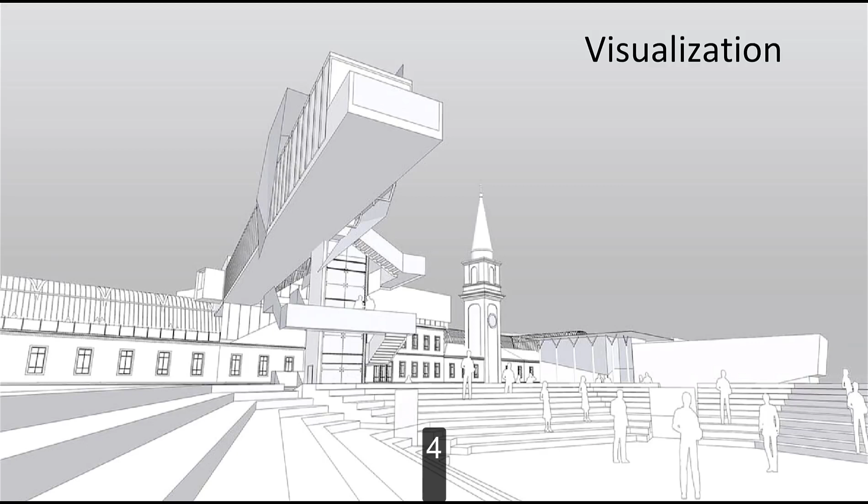Now, this is what architects and building designers have been doing since the very start. Of course, the way that they did it to begin with was with paper plans. These 2D representations of 3D space did what they needed to do, but they weren't always easy to read. As a design professional, I can sit down and look at a 10 by 10 space called out on a piece of paper and have an idea of what that feels like.

What's it going to feel like with an 8-foot ceiling versus a 9-foot ceiling? What does it look like with the doors and windows on this side of the room versus that side of the room? How's that going to change things? A design professional can look at those 2D pages and understand that. And we try to make that something that's easy to comprehend for customers. We add things like elevations and sections and isometric views. And it works out okay, but it's not something everybody catches on to right away.

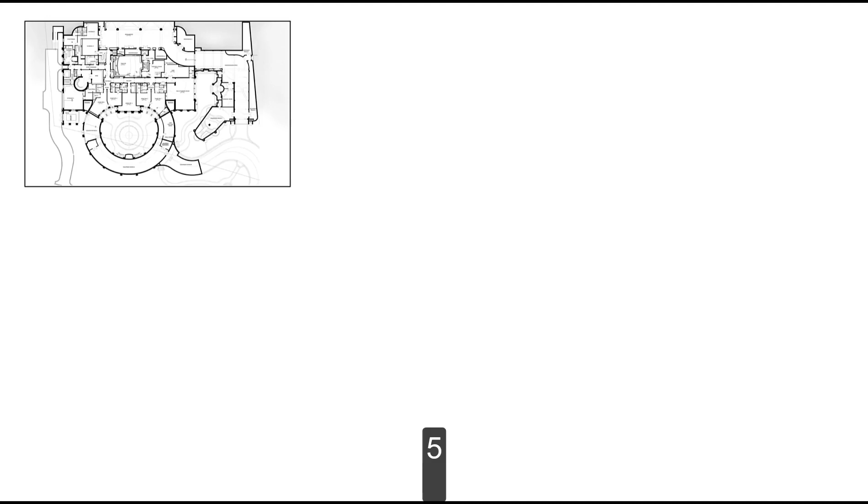That's why we have to do things like practical models. These foam core or balsa wood or even 3D printed models give somebody a chance to look inside and see how that actually exists in 3D space. It's all right, I can do things like light studies and flows through rooms and that sort of thing, but it's still not a real experience. I can't jump down and stand inside that. Plus, as changes are made, that potentially means starting over on a model, which can be time-consuming and expensive.

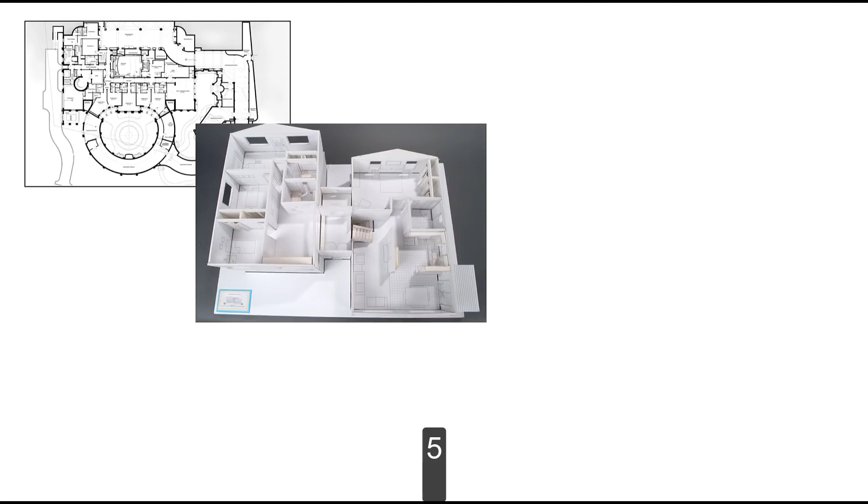This, of course, is where software like SketchUp comes into play. With a SketchUp model, I can not only navigate through a space, I can actually stand inside a model and look out of it as if it were real size. Changes that need to be made can be made real time without any costly rework. It's a great way to help somebody who is not a design professional experience a space in 3D. But it's not complete, and it's not the ultimate way to view or experience that space.

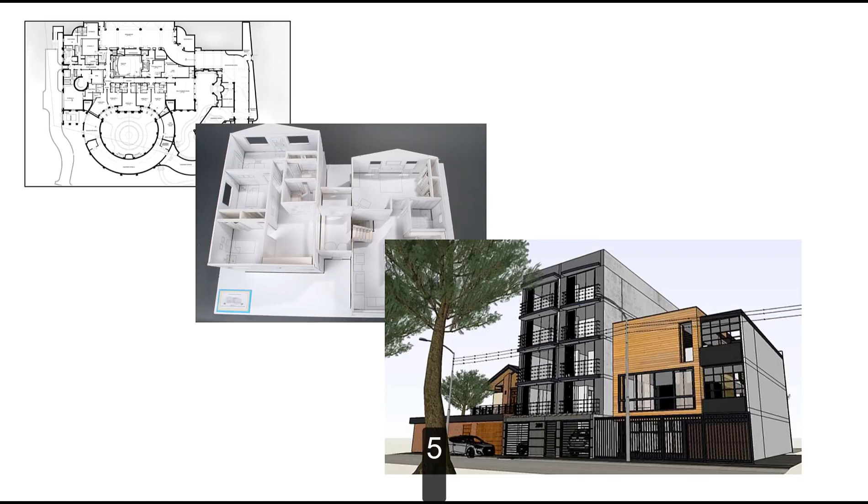One of the things that a lot of people end up doing is, of course, they get into rendering and animations and that sort of thing. This is not a bad solution either. This is kind of the next step. But there is a limitation to rendered images or videos from inside of a 3D model. And that, of course, is that it's on rails. It's limited to a single view, that sort of thing.

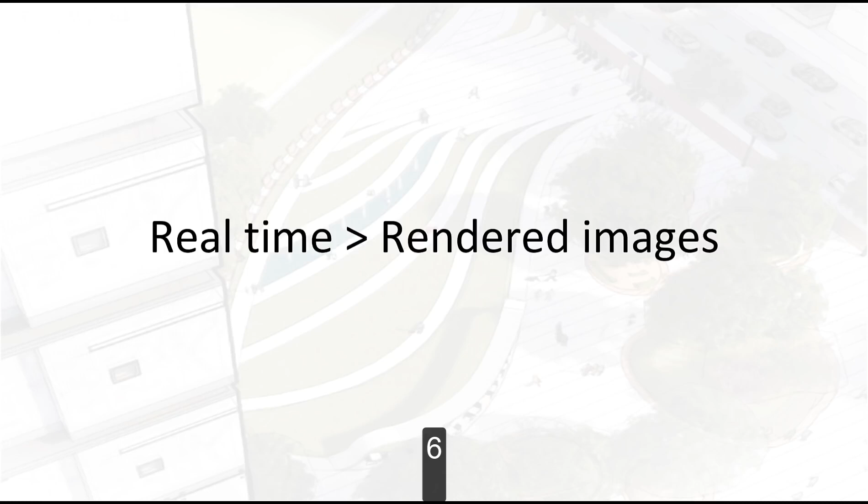This is where we believe that real-time rendering is better than those rendered images. Rendered images can be great, they can look great, but the fact is, you don't get to move through a rendered image. Even with pre-recorded videos or fly-throughs or fly-arounds, you're limited to the path that the designer wanted to show. With real-time rendering, the customer gets to immerse themselves in the model and move where they want to. It sounds silly, but a lot of customers have a way that they want to look at the house they're building that may be different from the prize shot that a designer wants to show them. Real-time lets them do that.

So, what's the best way to let a customer experience real-time? Well, we're biased, of course, but we think Unreal Engine and SketchUp are a great way to do this. Epic Games and Trimble have products that work very well together. As of this 4.20 release, they allow you to seamlessly integrate your SketchUp model into your Unreal design.

So why Epic Games and Trimble? Well, a couple reasons. The first one is speed. When we're talking about conceptual modeling, conceptual means I have to go quickly. I can't spend days, weeks, months on a potential design. I need to get it turned around quickly. In fact, the matter is, SketchUp is known for its speed in those sorts of design situations. Conceptual modeling is something that is done every day by design professionals inside of the SketchUp software.

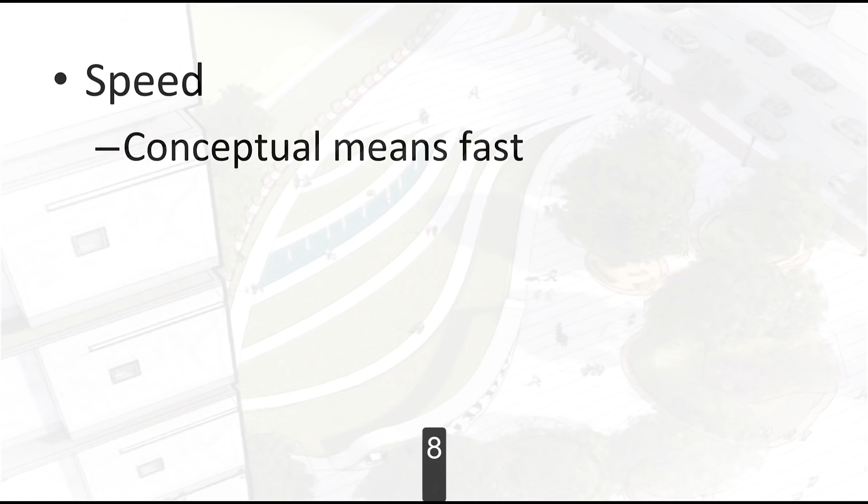And usability. So as we already talked about, with SketchUp, it is easy to use, it's quick to turn around a model, but looking at it from your customer's point of view, the deliverable out of the Unreal Engine is about as simple as it can get when it comes to navigating in 3D space. This gives your customer the ability to go where they want in the model and walk through in a natural way, using their arrow keys to just navigate wherever they want. It's quick and it's easy to do.

And finally, experience. SketchUp's been the go-to modeler for conceptual modeling for a decade and a half. A lot of 3D modelers nowadays cut their teeth on SketchUp. And Unreal, of course, Epic Games has taught an entire generation how to navigate spaces in 3D. So between the two, we have decades of experience in 3D modeling and allowing people to explore that 3D space. So really, that explains what we think of visualization and why we think Unreal and SketchUp work so well together to help you give your customer a unique experience in their designs.

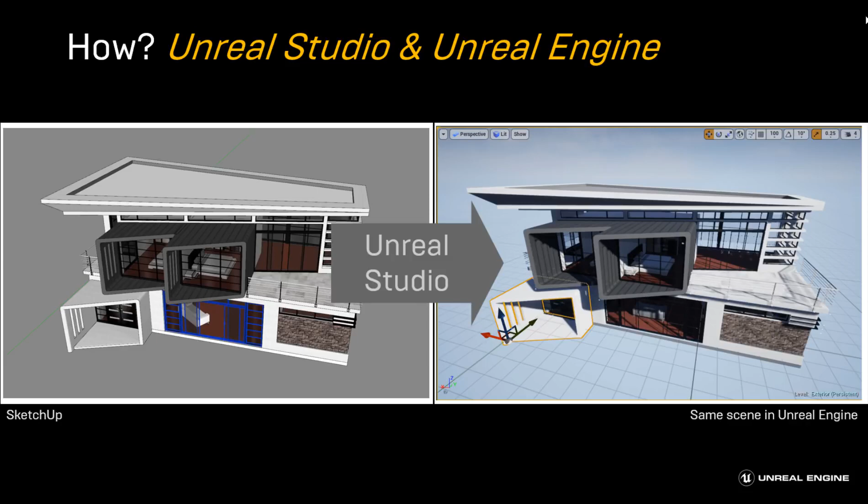So what we want to do is get a really nice looking piece of content from SketchUp and get it into Unreal Engine, preserving as much of the original look as possible. Now this has a lot of implications for how you create your content, and we'll get into that in a few minutes.

But let's at least take a look at some of the SketchUp workflows. The workflow is very similar for a 3ds Max user. You simply export from SketchUp and then re-import a .udatasmith file into Unreal Engine. We have re-import workflows in Unreal so that if you make changes upstream, we can capture those changes in Unreal Engine. It's important to note, though, this plugin isn't necessarily doing any geometry fixing.

You're still going to have to pay particular attention to how you are setting up and creating your geometry. You want to make sure that you're creating it in a way that is friendly to a real-time engine. And again, we'll take a look at that in a minute.

Okay, so let's go ahead and take a look at some of the workflows here. Before we jump in, just a couple of quick notes. I'm going to show this workflow from the point of view of someone who is relatively new to Unreal Engine and Unreal Studio Datasmith. So if you're already an Unreal Studio Datasmith user in some of the other applications we support, this may seem a little repetitive, but I just want to be sure we cover all the bases for someone who might be new to Unreal Studio but is a SketchUp user.

So this is a nice piece of content that we acquired from our friends on the 3D Warehouse. So thanks to them for providing some great content that we can show and present to you today.

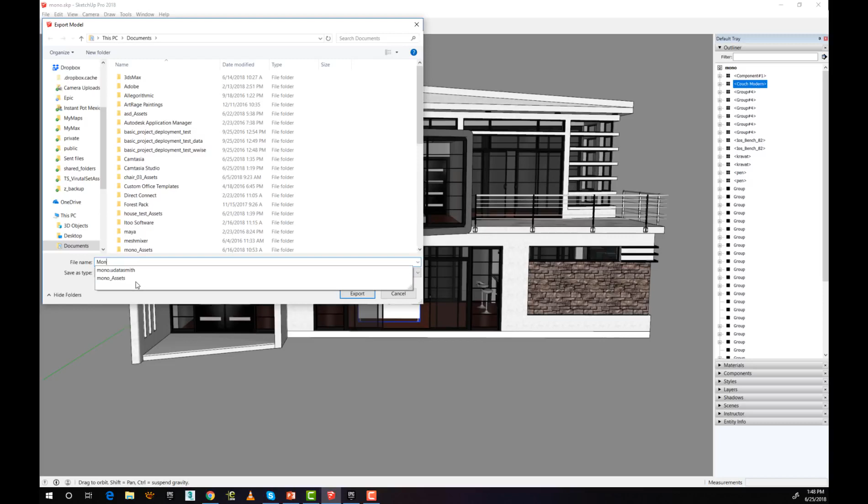Real simply put, after we have installed Unreal Studio and the Unreal Studio plugins, we go right to the File menu and we'll just do File, Export a 3D model. From here is where we can actually choose to export our datasmith file. So we'll just go ahead and we'll call this mono_2, and we'll just choose a quick export.

And there's really not a whole lot to do on the exporting side. It's the importing side where things get interesting.

So I'm going to go ahead and bring over the Unreal Engine launcher, which I have already started. Now, it's important that if you're going to be trying this out for yourself, you want to be using version 4.20. We're currently in the preview of 4.20, so you want to have Preview 3 specifically installed. If you don't have Preview 3 installed, you may get a little wonkiness in terms of some of the assets that are brought in. So just make sure you're using Preview 3.

I'm going to go ahead and launch a new project with Unreal Studio 4.20 Preview 3, and we'll bring it right in.

Okay, so now that it has launched, it's brought up the Unreal Project Browser. And on the New Project tab, you'll see there are 3 sub-tabs: the Blueprint tab, the C++ tab, and the Unreal Studio tab. We want to create a project with a blank Unreal Studio project because this is going to give us access to the Unreal Studio Datasmith plugins.

So I'm going to rename this something similar. We'll go ahead and create our project there, and we'll give it a chance to load the editor. Okay, so now that the editor is loaded, we're going to go ahead and import our datasmith file.

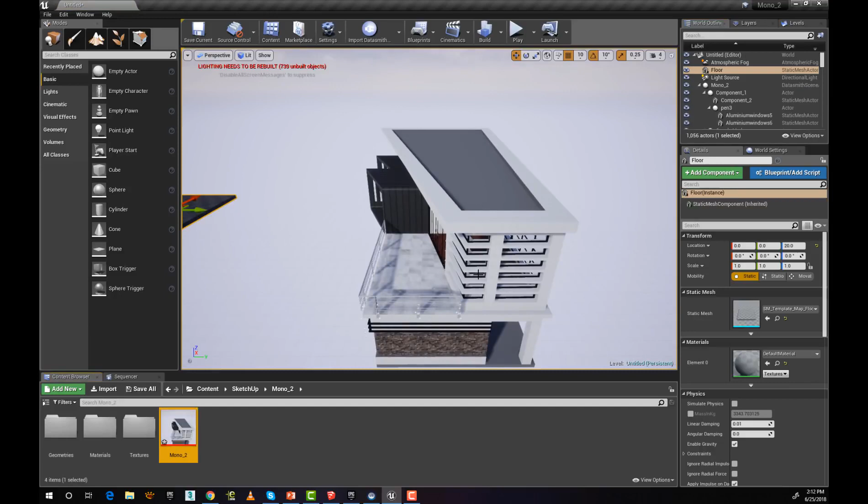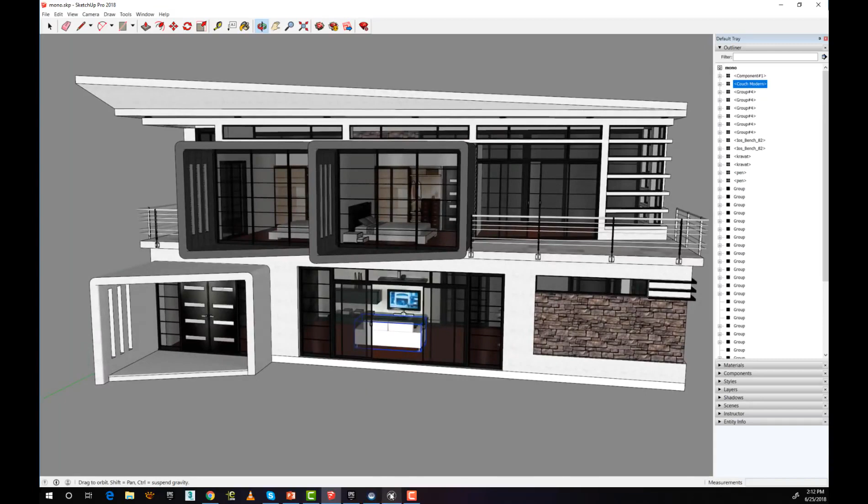And here it is. Our file has been brought in, and you can see we have really good fidelity compared to the file we had in SketchUp. I'm going to bring SketchUp back so we can take a look. Here's the file again in SketchUp, and here is the file in Unreal Engine.

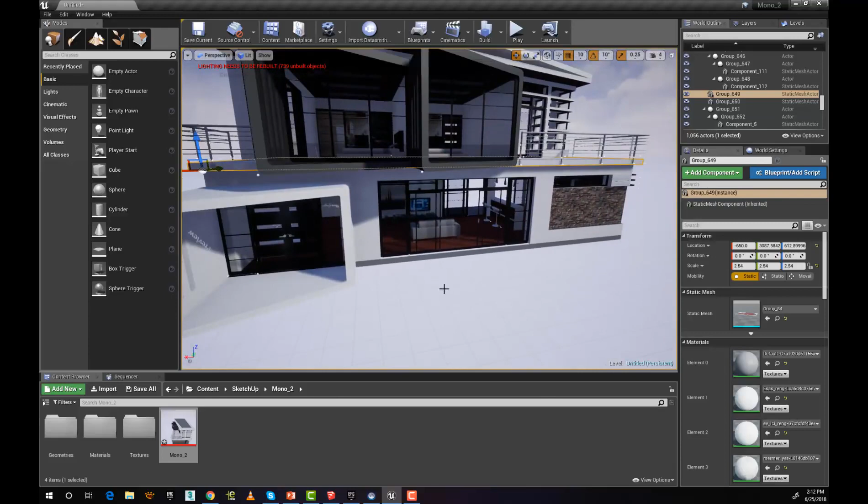All of the translation has occurred. The objects have been brought in, the textures have been brought in, all of the objects are in their proper place, and all of the materials that have been created are properly applied. Everything is just as we would expect. This is one of the real advantages of Datasmith, that we don't have to redo a lot of work. The goal is to make it easy to on-ramp into Unreal Engine and start working quickly, as opposed to having to redo a lot of work.

So what actually imports, and how is this handled between SketchUp and Unreal Engine? In Unreal Engine, we have the notion of a static mesh object. Static mesh objects are derived from SketchUp meshes that have either connected faces or that are part of the same group or component. Let's take a look and see what that actually means.

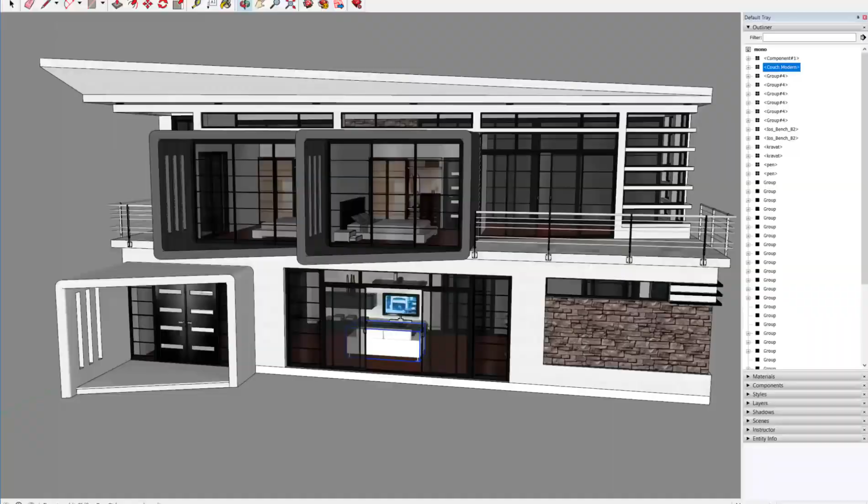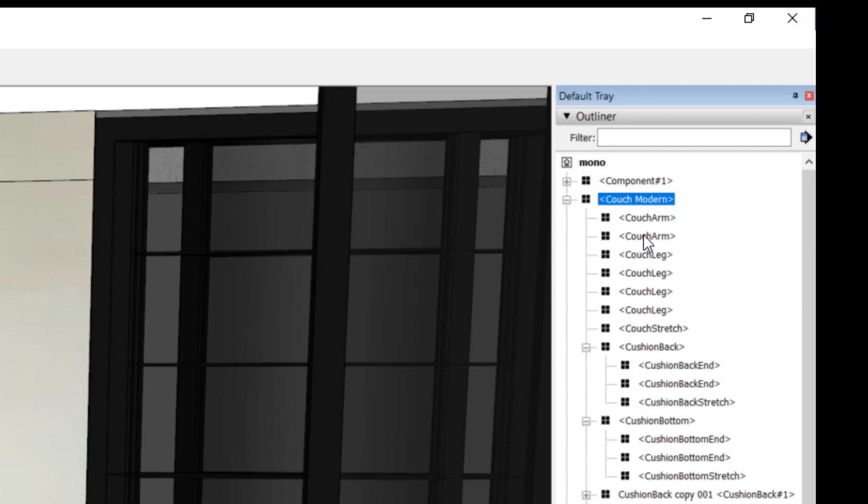I'm going to bring back SketchUp here and focus on a couple of different things. We have our sofa and our entertainment area with the TV, books, and things on it. I'll select the sofa first, and you can see over here it's called Couch Modern, and it has a couple of different components underneath it, with cushions and a hierarchy of objects that are part of the couch component.

So what does that look like in Unreal Engine? I'm going to pop back over to Unreal Engine, select this object, and zoom in on our couch. Here's the couch object, and if I open up the world outliner, you can see the object has come in, all of our hierarchy is maintained, but all of the component groups have been converted to single static mesh actors. Anything that was a component in SketchUp is turned into a static mesh actor in Unreal.

But what about the entertainment center? Let's talk about that. This is actually kind of an important thing to understand about Unreal Engine.

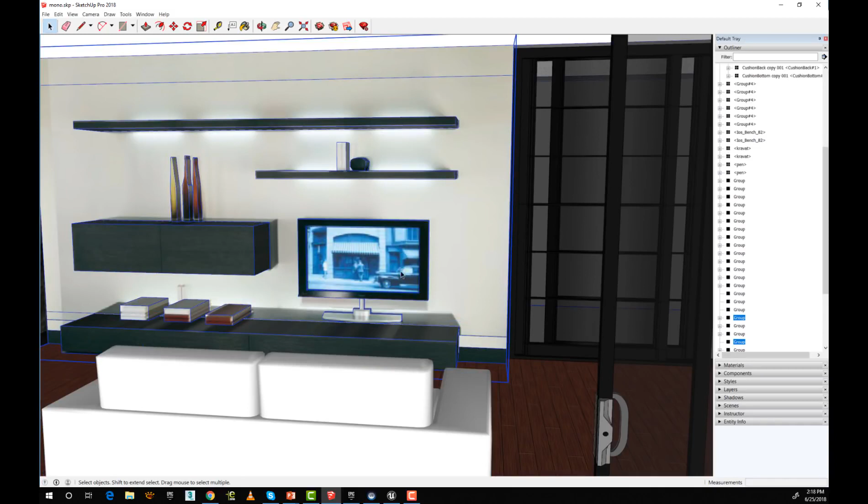If I go back over to SketchUp and select this component, let me orbit here, you can see that this is actually treated as one group. When it comes into Unreal Engine, it's treated as a single static mesh actor, and all of these objects are lumped together.

Now, you may think that could be a good thing, but it actually does have some implications in terms of textures and light baking.

So again, this is the world outliner. If I scroll down here, I can get into the details panel of this piece of geometry. I'm going to double click on the static mesh actor, which will bring open a viewer that lets us see the static mesh actor by itself.

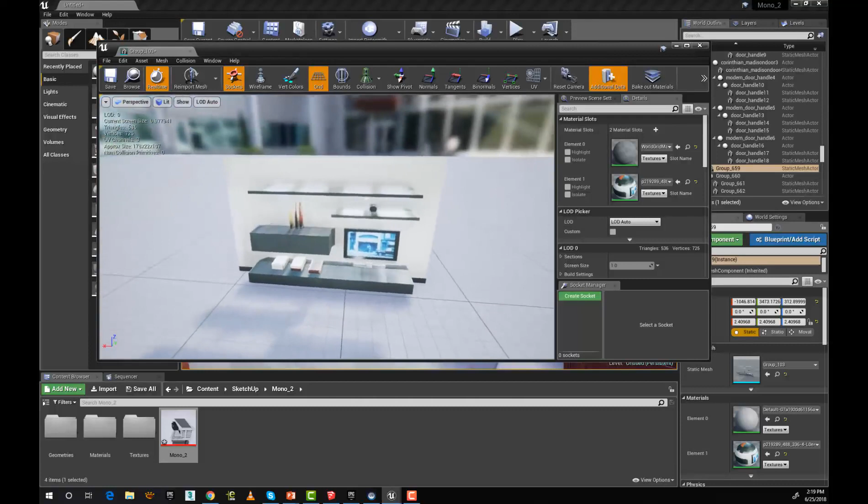We can see that this is a single object, but it appears to be made up of several different objects. This is a really important piece of information to think about when creating your scenes to be exported via Datasmith to Unreal Engine, and how they will be treated.

When you organize an object like this, you really lose the ability to do certain types of material edits or light baking or other tweaks to the surface properties that you might want control of in Unreal Engine. You lose that control because this is now treated as one object.

If we look at the material and the texture of this piece of geometry, we can see that all the different elements of the object group from SketchUp are combined into this one material. If we navigate over to the texture map, we can see it illustrated even more.

So this isn't really going to be very useful if we're going to try and do any edits on the static mesh or the individual components of the static mesh in Unreal Engine.

A better approach would be to organize these back in SketchUp so that they're individual components, where the wall is a separate component and each shelving unit is a separate component. If you do that, it will break them apart upon import into Unreal Engine and give you better options for what you can do with it.

So, speaking of materials and textures, let's talk about what actually happens when those things are brought into Unreal Engine. The first thing that happens is a dedicated material instance is created by Datasmith, and this reflects kind of what the basic material parameters are from SketchUp.

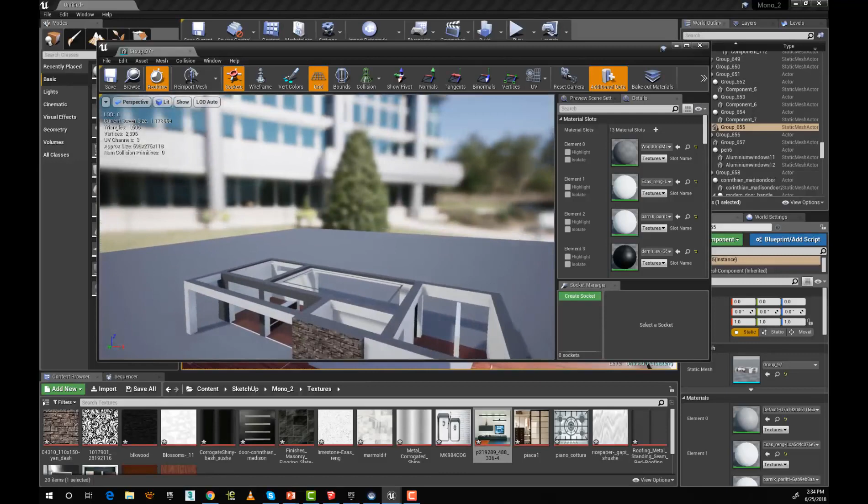Before I jump into the floor material, here on the details panel you can see that this was brought in as a group, and this has a similar issue as the wall with the TV panel, where a lot of things came over that really probably should have been separate objects, or at least separate groups in SketchUp.

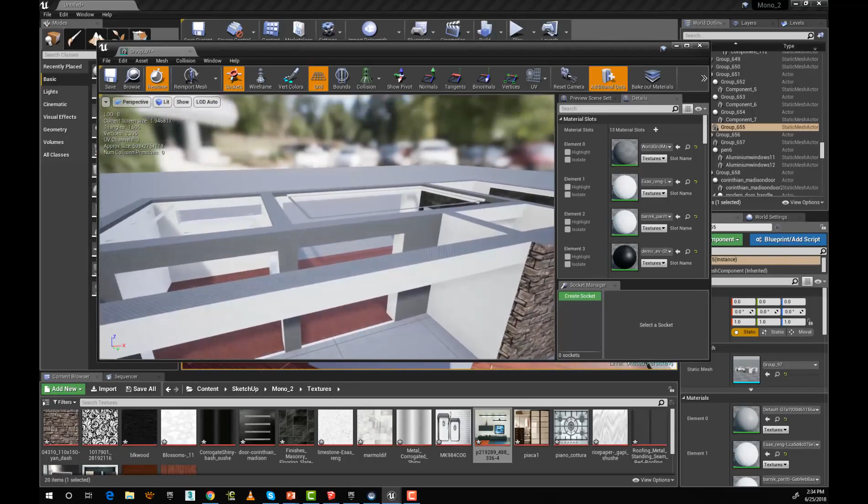This is going to be a little tricky to work with in the long run. For this example it'll be fine, but you're really going to want to have better consideration about how you break up your object groups so you're able to work with them a bit.

So let's go ahead and close this back up. I'm going to scroll down in the details panel and look for the wood material that's on the floor. This is element 6 here.

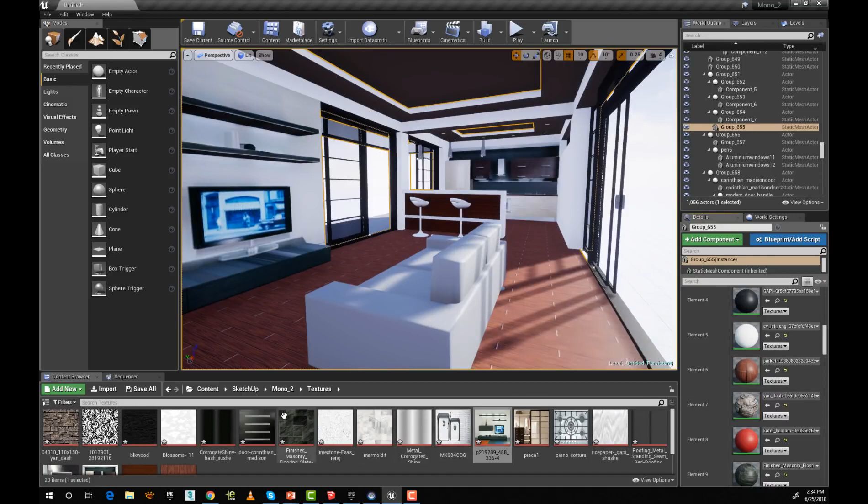That's what this material is. So I can either open the material here, or I can go into my content browser, and here's the SketchUp folder where we brought everything in. If I start to open up some of these folders, you can see that I have geometry, materials, and textures. I'm going to go ahead and open up materials, and you can see all of our materials are brought in right here.

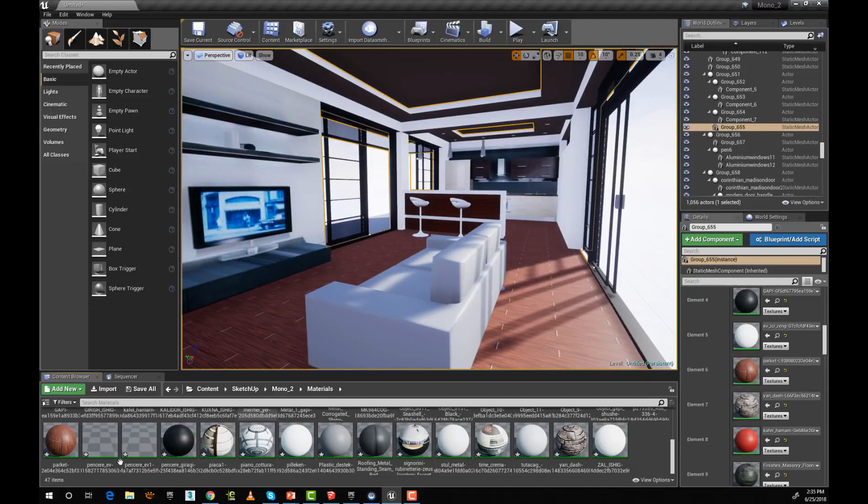This is the material that we're going to look at right now. It's the same material that's over here on the details panel. So I can either double click it here, or I can double click it here. Either one is the same, although this one is actually the one that's on the object. So I've opened up the material editor. You can see our material opens up.

This has the same SketchUp materials that we have on the object that's come from SketchUp. But what I want to draw your attention to is this new set of options right here. This is what we've added on import. These are the PBR features, or physically based rendering features, that we've added to the material. We've added some metallic settings, and we've added the use of a roughness map or roughness intensity.

So if I change these, it will change the appearance of the floor. I'm going to move this down a little bit and see if I can get to this setting here. You can see that we can begin to add some reflectivity. If we want to add in, like I said, a roughness map or a metallic map, we can add that in there.

This is going to get you a little farther down the road faster in having some nice looking materials. While we're talking about materials and textures, let's take a look at some of the ways that Datasmith actually helps out with UV maps.

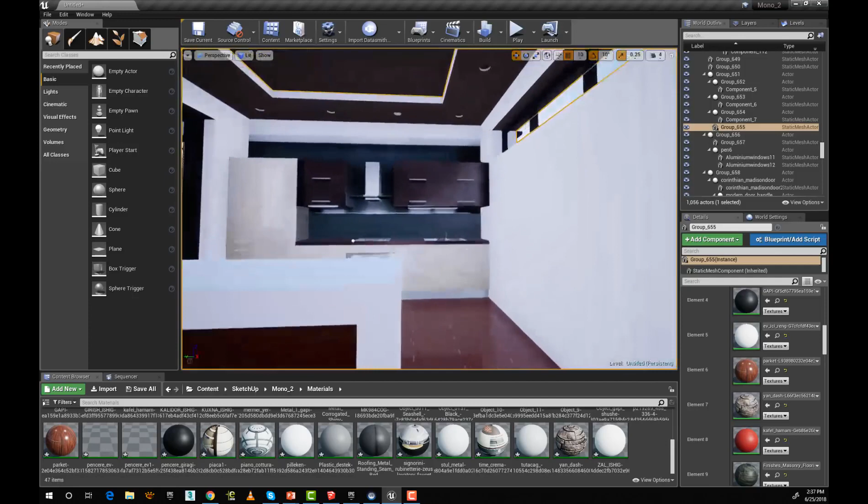So I'm going to navigate over here to the sink. I'm going to orbit around to where I can see the sink a little bit better, and we'll zoom in. So let's go ahead and open this up in the static mesh editor. I will just navigate here up to the top of the details panel and double click, and we'll zoom in a little bit and we can get a good look at this piece of geometry.

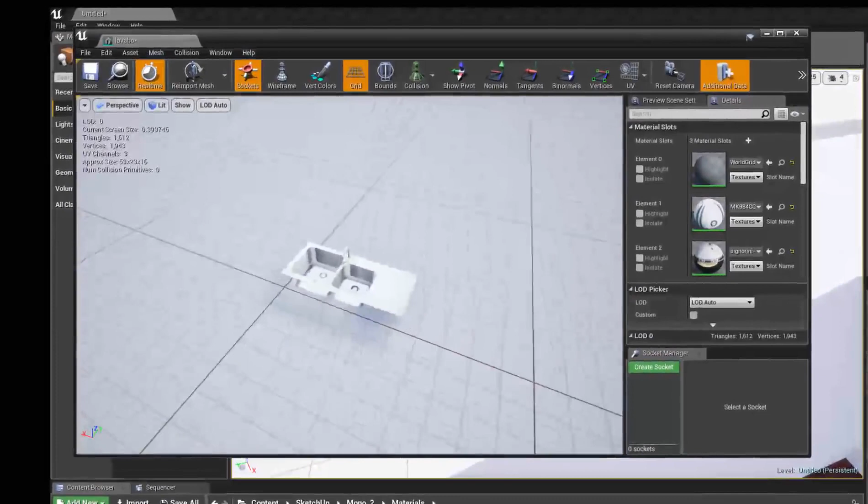As SketchUp users are probably aware, there are some limitations when it comes to UVs in SketchUp and how they're controlled. Fortunately, we do one thing in Unreal Engine that aids in the use of UVs for light maps.

So I've opened up the mesh viewer, the static mesh actor, and in the toolbar across the top we have a button here that says UVs. If I go in here and I take a look at UV channel 0, those are the UVs that come over from SketchUp directly. You can see there's a lot of overlap in there.

So if you have overlapping textures or overlapping UVs, your textures may look a little bit wonky. Unreal Engine is pretty forgiving when it comes to overlapping UVs in that it doesn't kick you any warnings, but it's really not a very good best practice, especially when it comes to possibly light baking your scenes.

Now, what is light baking? Simply put, light baking is taking all of the lighting information that's in the scene and baking it into the textures. And this improves performance significantly.

This is related to my previous comments about how objects should be divided up into more explicit or smaller object groupings. Because when it comes to light baking, you don't want to have everything be all one object because that's quite limiting.

So back to UVs for a second. If I go to my UV dropdown menu and I choose UV channel 2, this is what Datasmith has created upon import. This gives us the ability to have non-overlapping UVs that are usable for light baking.

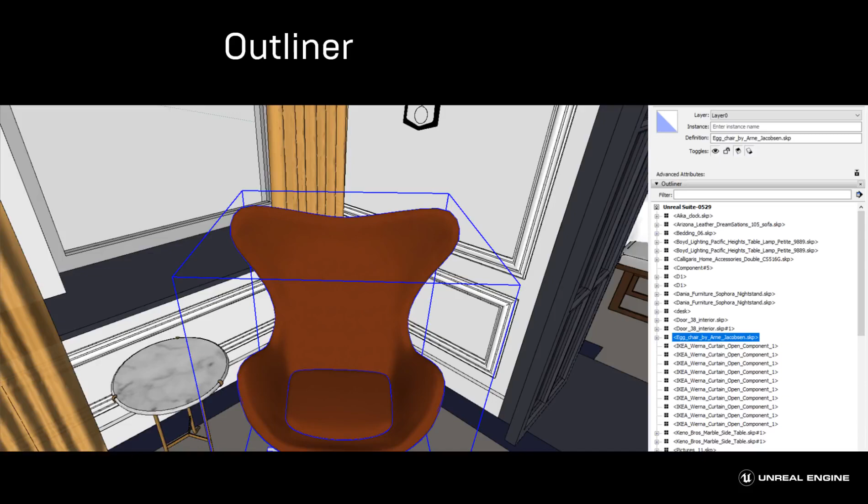Good object names or good component names will translate into good static mesh actor names in Unreal Engine. So it's really important to have nice, clean file naming conventions, because that'll make everything a lot easier in Unreal Engine. Another component you can consider using is Cleanup Cubed.

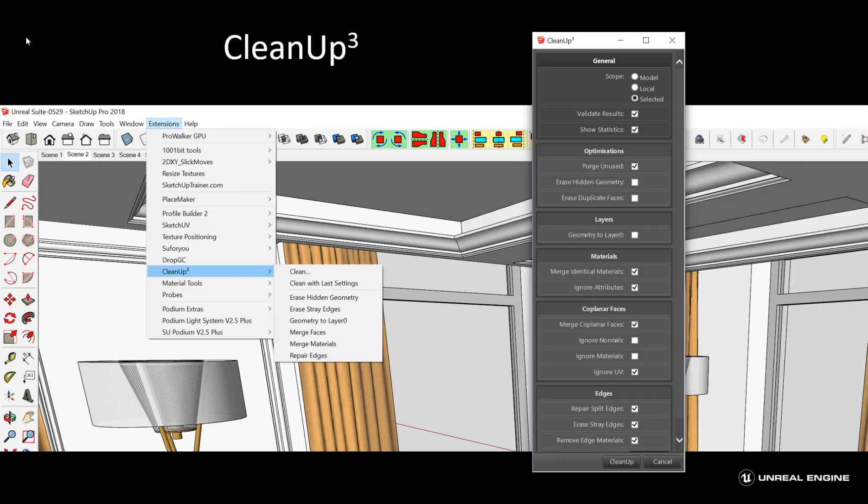Cleanup Cubed is a nice extension because it basically does a geometry check on a lot of your geometry. It will allow you to merge identical materials and show the statistics, but it also purges unused components or features of the geometry. It will repair edges. It will basically clean up the geometry in a way that will make it more likely to have success and avoid problems with your geometry in Unreal Engine.

The next one is Sketch UV. I talked a little bit about UVs in the material section, and Unreal Engine is kind of forgiving when it comes to texture UVs, but not very forgiving at all when it comes to light map UVs. So using something like Sketch UV will at least give you a little bit of control over the texture UVs, and will improve the probability of success of having good looking materials on your geometry as well.

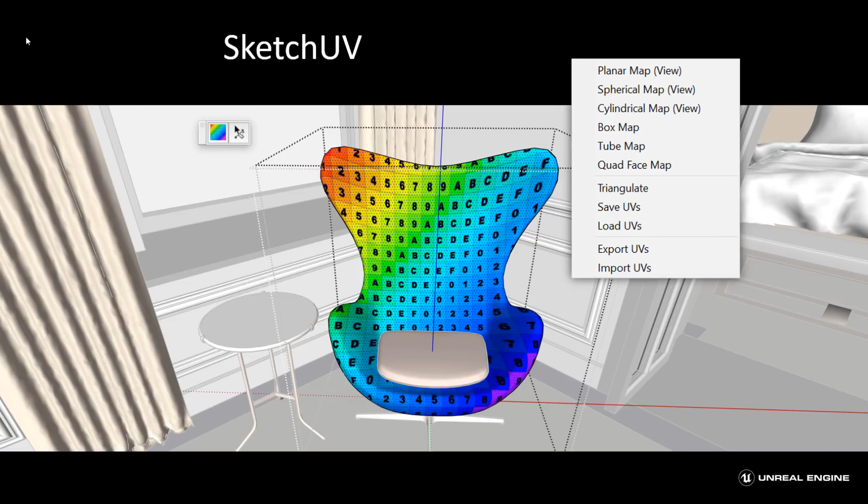The last one is Solid Inspector Squared and Solid Tools. These two things may seem a little unusual when you're thinking about going to a real-time engine like Unreal Engine, but it actually makes a lot of sense. What these do is basically double-check your models to make sure that they're watertight, as if you were going to 3D print them.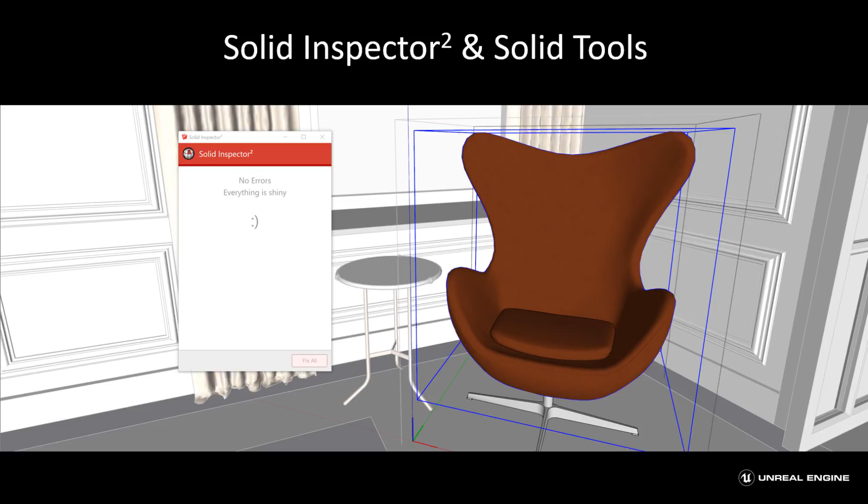The nice thing about this is that a 3D printed model has to be completely closed, has to have good geometry, has to have no open edges or stray vertices or things like that. And coincidentally, those same features make for good geometry in Unreal Engine. So using an extension like this will help you make sure that you have the best geometry possible before it heads over to Unreal Engine.

There is one more thing I'd like to tell you about. We've talked a lot about things specific to Unreal Engine, but if you're coming to Unreal Engine from SketchUp, you might not be aware of things like post-process volumes to make images look great, UVW maps, lighting and materials, PBR, all of those different things. Well, we have a lot of resources for you that you can use for free.

If you go to unrealengine.com and go to the Resources dropdown, under Video Tutorials, you'll find a large number of video tutorials prepared just for enterprise users. These are not how to make video games. These are things related specifically to design visualization, anything from interior real-time projects to exterior projects, real-time fundamentals, lighting essential concepts. These are all things that, if you're new to Unreal, will really ease your transition into working in a real-time environment in Unreal Engine.

So I strongly recommend that you take some time to peruse these topics and see how you can apply them to the projects that you're working on in SketchUp and Unreal Engine.